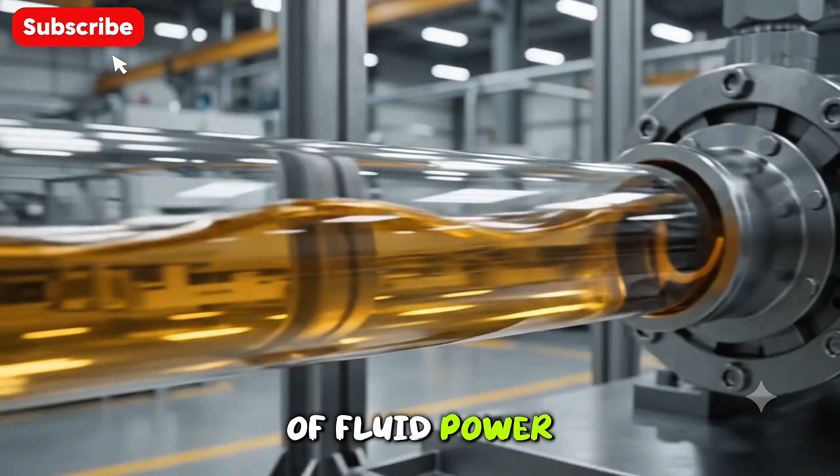Welcome to today's Explainer, where we're going to demystify the hidden magic of fluid power. It's literally the invisible muscle that allows a machine to push with tens of thousands of pounds of force. We're talking about the power driving those massive heavy excavators, the towering cranes, and the aircraft that literally shape our world. It's this fascinating, immense force, and it's all just hiding right there in plain sight.

So let's kick things off with a pretty relatable scenario. Think about the sheer mechanical advantage you need to lift an entire car. You've probably done this yourself, right? Using one of those tiny, simple hydraulic jacks, and it takes almost zero physical effort on your part. But how is that even possible? What invisible muscle is doing all that heavy lifting for us?

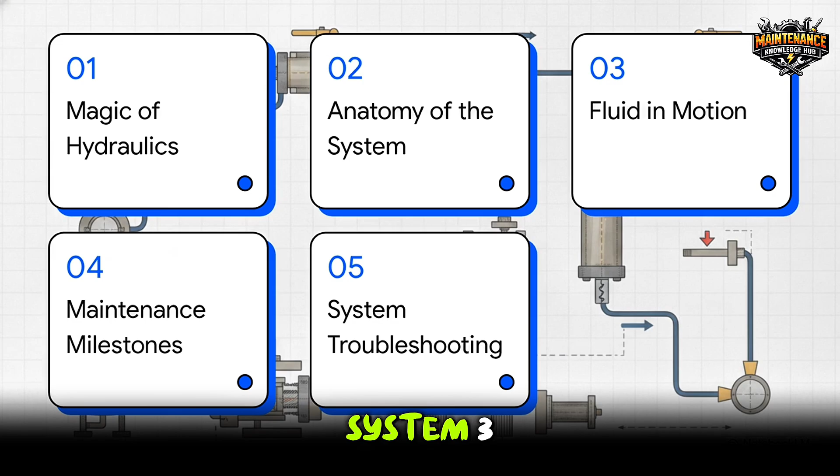To answer that, here is our agenda for today. 1. The magic of hydraulics. 2. Anatomy of the system. 3. Fluid in motion. 4. Maintenance milestones. And 5. Troubleshooting common problems. Let's dive right in. Starting off with Section 1, the magic of hydraulics, the secret ingredient.

Okay, so the entire concept of fluid power rests on this single, absolutely crucial scientific principle, Pascal's law. It states that because a confined liquid transmits pressure equally everywhere, a really small force applied at one point is converted into a massive force at another. Now, the key word here is confined. Since the fluid has literally nowhere else to go, it transfers that energy without losing a drop of it.

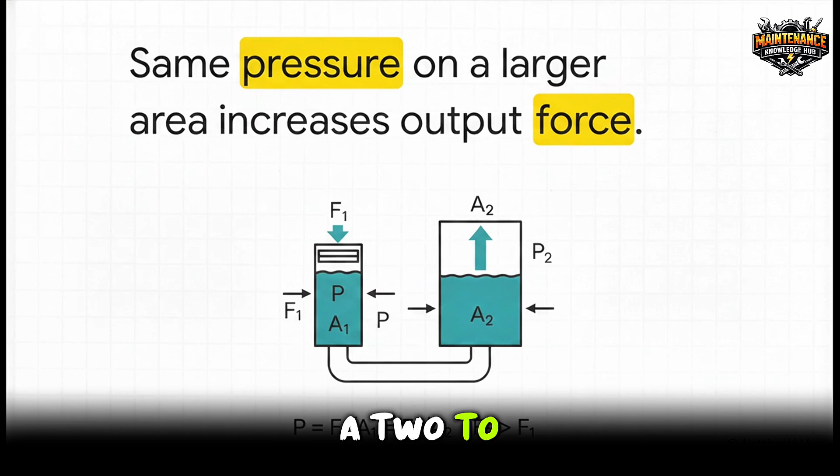To see exactly how that force multiplies, let's look at the relationship between pressure and area. The output force, F2, is equal to the system pressure multiplied by the area of the output piston, A2. To put that into perspective, if you have 1,000 pounds per square inch of pressure acting on a 10 square inch piston, boom, you've just created 10,000 pounds of lifting force. I mean, that is an incredible mechanical return on investment.

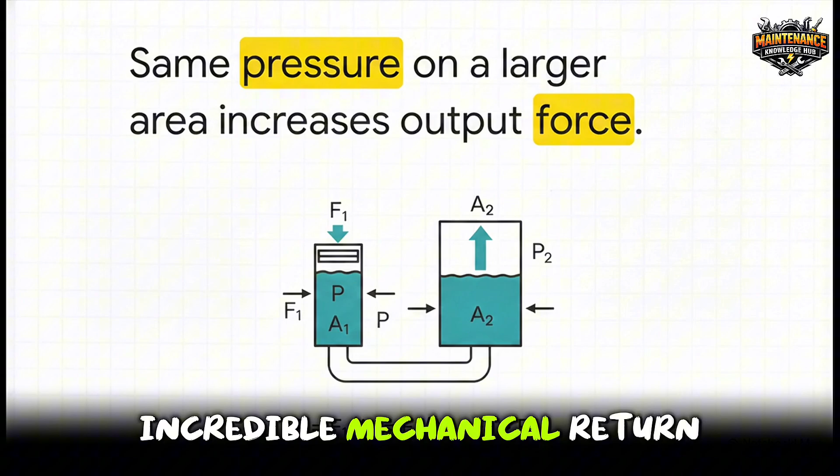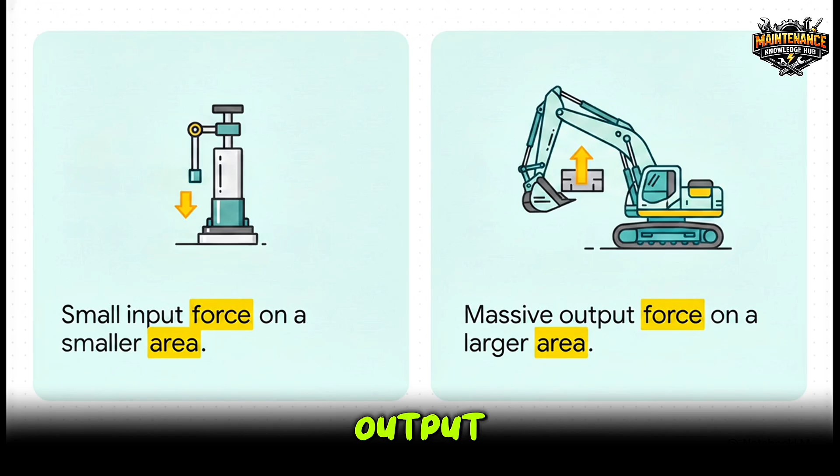This whole dynamic perfectly explains how applying consistent pressure to a much larger output area effortlessly multiplies your tiny physical input into this massive mechanical output. It's exactly why that tiny hand jack can lift a car so smoothly and just hold it there without you having to constantly pump it. The fluid essentially acts like an unbreakable, completely flexible steel rod.

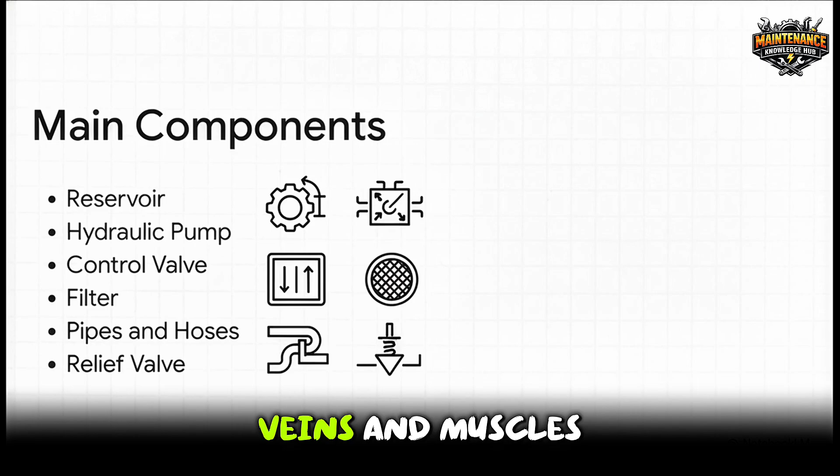Moving on to Section 2, anatomy of the system, building the machine. Now that we've got Pascal's law down, let's look at the physical hardware. It honestly functions a lot like the heart, veins, and muscles of a human body. Every setup relies on these core components. You've got the reservoir storing the fluid. And we use specialized oil for this because, unlike water, it won't rust the internals, and it acts as a necessary lubricant.

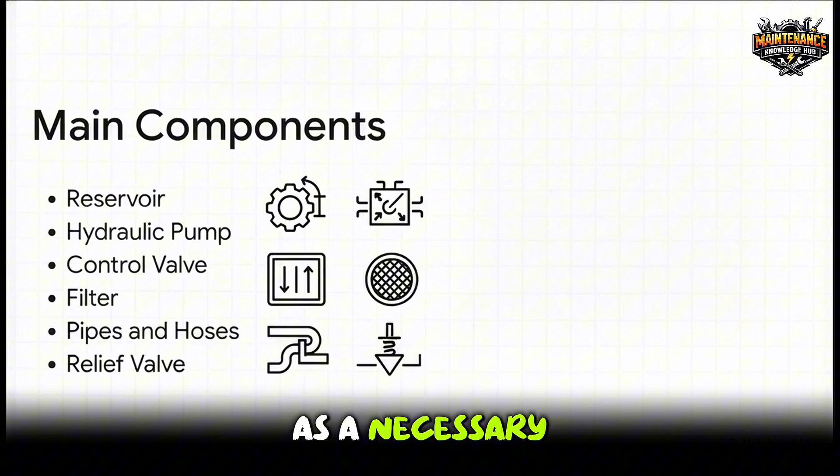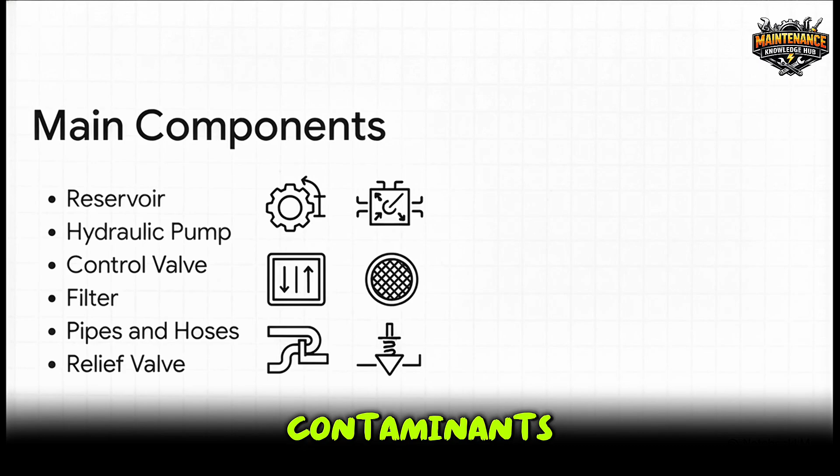Then the hydraulic pump acts as the heart, pumping the oil to convert mechanical energy into hydraulic energy. The control valve is the brain, directing the flow. The filter keeps everything free of contaminants, while the pipes and hoses are your veins. And finally, the relief valve, super important, protects the whole system from excessive, dangerous pressure.

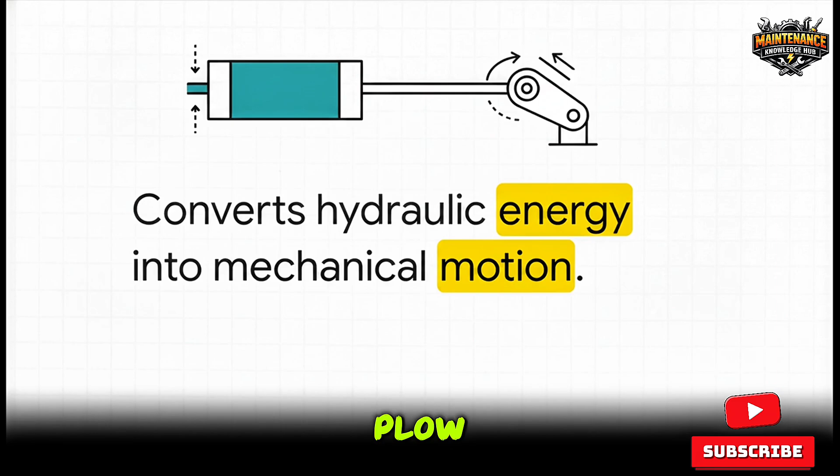But what's the ultimate goal of all this anatomy? Well, it's the actuator. Whether we're talking about a linear cylinder pushing a heavy plow or a hydraulic motor spinning an industrial drill, this is the actual muscle of the machine. It takes that highly pressurized fluid and converts it right back into real-world physical mechanical motion. This is where the actual lifting and pushing happens.

All right, Section 3, fluid in motion, the journey of a drop of oil. Let's trace the path of a single burst of oil as it travels through the system.

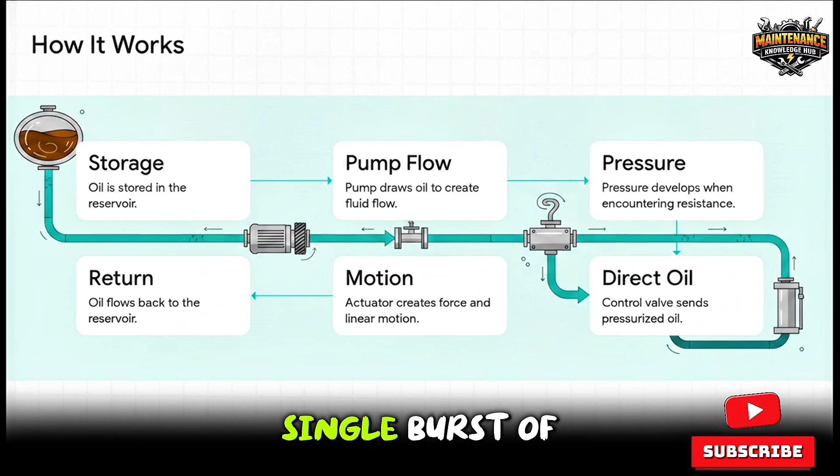This sequence is basically the heartbeat of the machine. Step 1, our drop of oil is just resting in the tank. Step 2, it gets drawn out by the pump, creating flow.

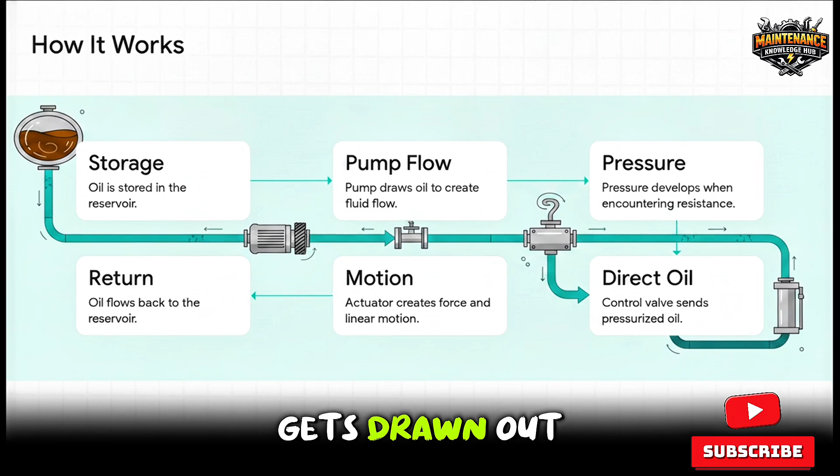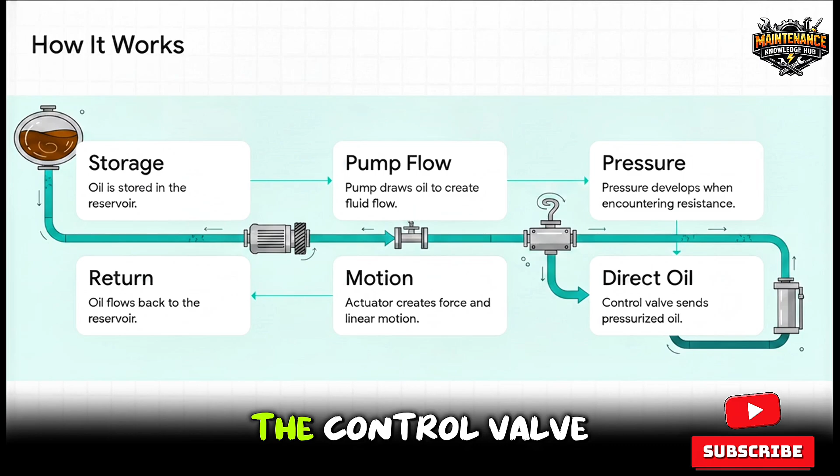Step 3 is vital: pressure only builds up when that moving oil actually hits resistance. Once it's pressurized, Step 4, the control valve directs it to the exact actuator that needs it. In Step 5, that pressure slams against the piston, creating the physical force.

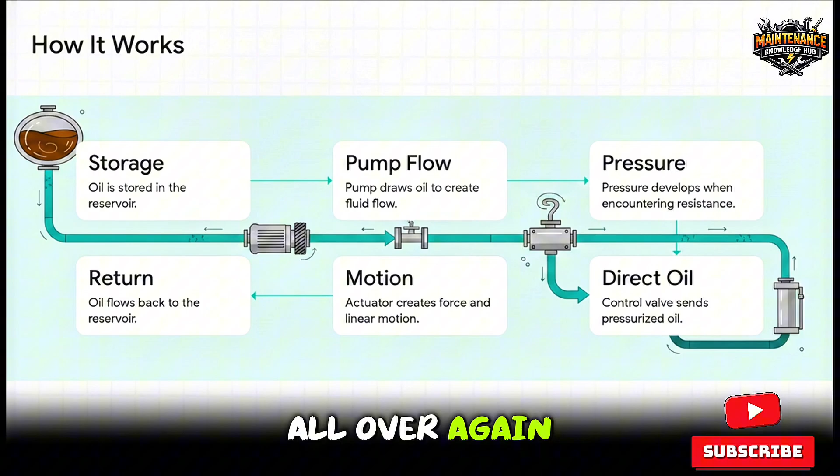And finally, Step 6, after a hard day's work, the oil flows right back home through the return line to the reservoir, ready to do the whole thing all over again. That brings us to Section 4, maintenance milestones: keeping the power alive.

We've seen how beautifully the system works, but all of this immense power brings us to an absolute, non-negotiable rule: safety. Before you even think about grabbing a wrench, you must shut down the equipment and apply lockout/tagout procedures. And most importantly, you have to completely release that hydraulic pressure.

Hydraulic fluid under pressure can be so intense that a pinhole leak acts like a literal laser. It can inject oil right through a heavy leather glove and deep into your skin. It is incredibly dangerous if the system is opened unexpectedly.

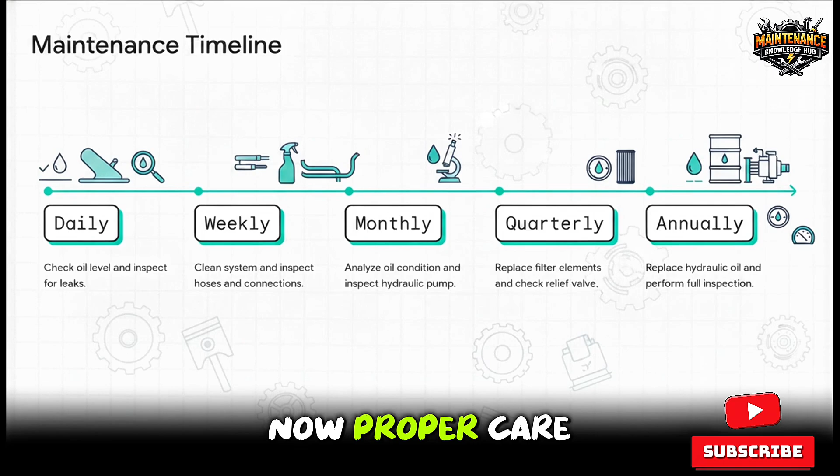Proper care is really all about rhythm, and this escalating timeline maps out your milestones perfectly. Daily, you're checking reservoir levels and hunting for any leaks. Weekly, you're cleaning components and checking hoses for dangerous bulges.

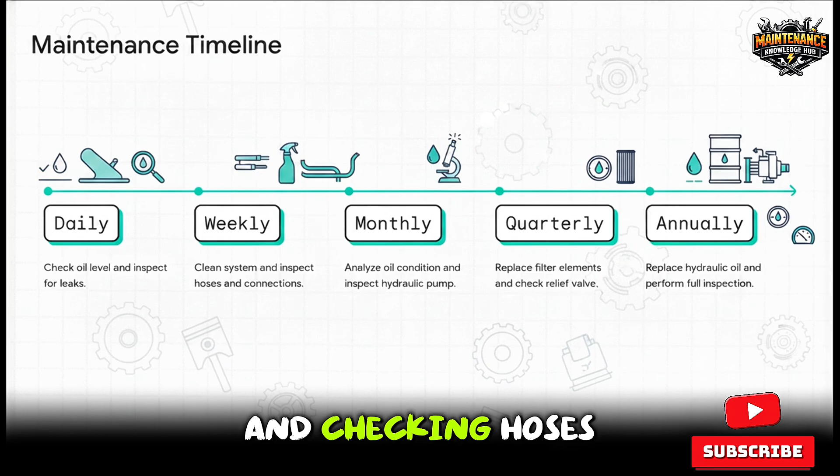Monthly, you're taking a deep look at the oil condition. Is it milky? That means water contamination. Does it smell burnt? That points to overheating.

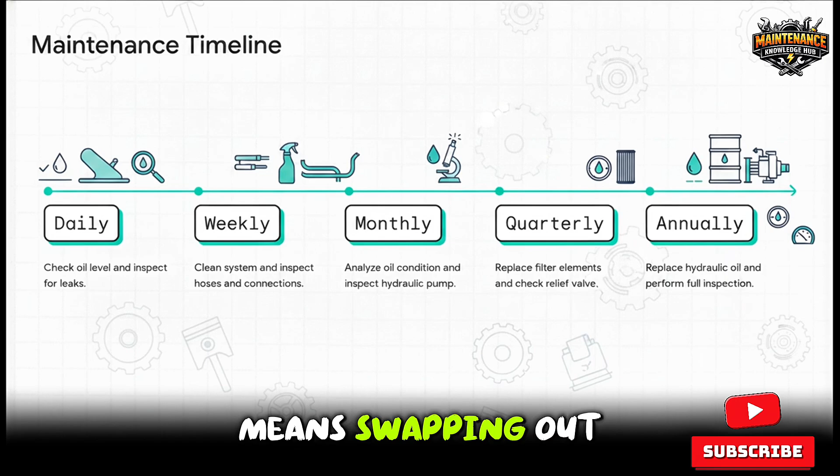Quarterly means swapping out pressure and return line filters, plus checking your relief valve settings. And annually, it's time to drain the old oil, clean the tank, and do a massive, comprehensive system inspection.

Think of these best practices as your cheat sheet for system longevity. If you strictly adhere to these rules, like always keeping your oil flawlessly clean and dry, because dirty oil acts like liquid sandpaper inside your pump, you are going to drastically reduce failures. Using manufacturer-approved grades and meticulously recording your maintenance dates ensures your pumps, valves, and cylinders will survive years of heavy-duty abuse.

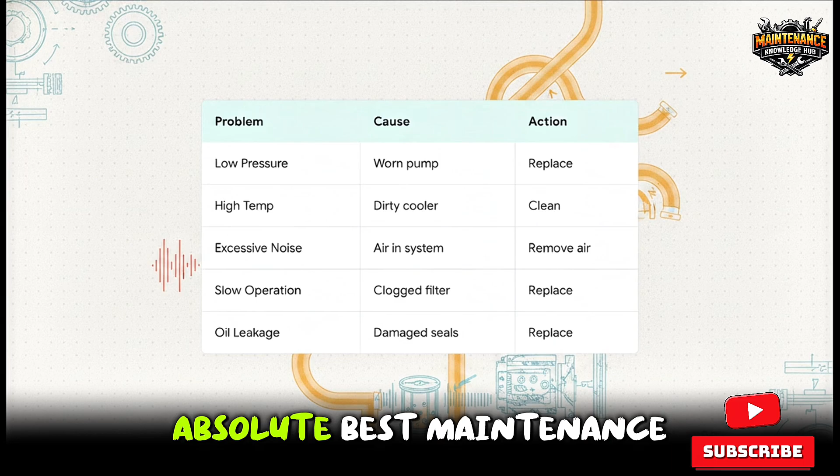Finally, Section 5, System Troubleshooting: fixing common problems. We all know that even with the absolute best maintenance schedule, the real world is unpredictable. Things will go wrong. But when they do, you can usually match the symptoms directly to their cures.

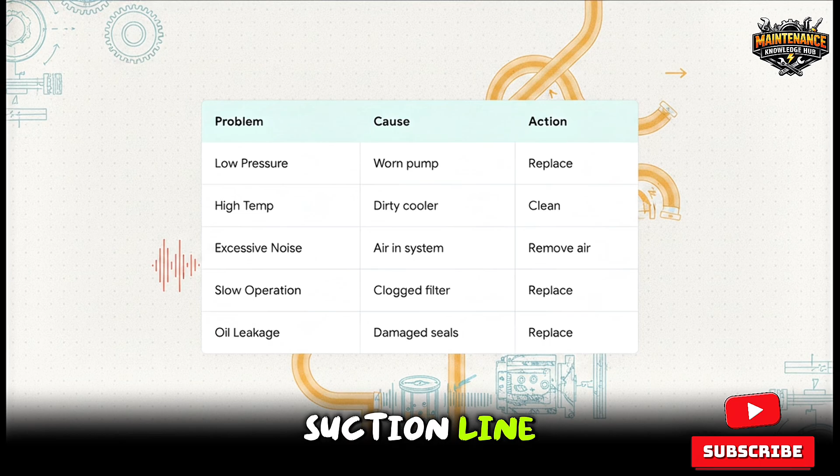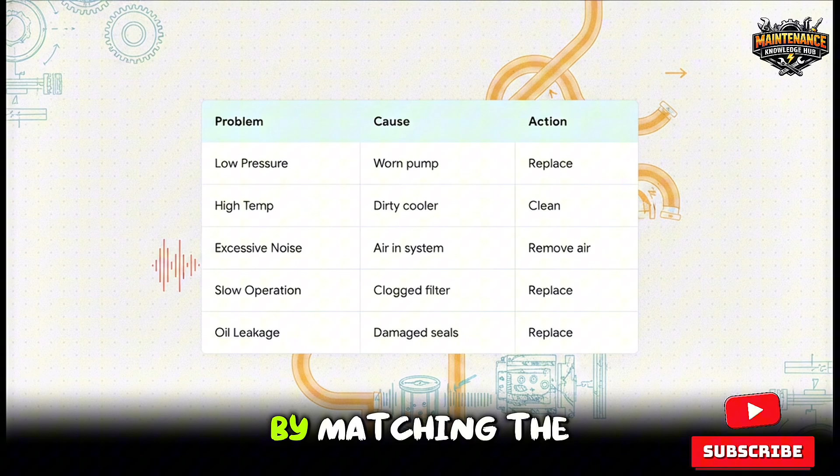For example, if you hear a screaming, excessive noise coming from your pump, it's likely air trapped in the system causing cavitation. That means you need to remove the air and check the suction line. Or say a massive excavator is suddenly suffering from really sluggish, slow operation. You can usually trace that straight back to a clogged filter, or maybe a worn pump that desperately needs inspecting and replacing. By matching the specific problem to its cause, you turn this complex mechanical beast into a completely solvable puzzle.

And that brings us to the end of our journey today. Hopefully, this explainer has completely transformed how you look at heavy equipment. Armed with Pascal's law and knowing the ins and outs of pumps, valves, and actuators, you are now in on the secret.

So I'll leave you with this thought: the next time you see a massive crane hoisting a steel beam high into the sky, are you just going to see a metal machine? Or will you picture the incredible, hidden fluid power silently lifting the modern world?